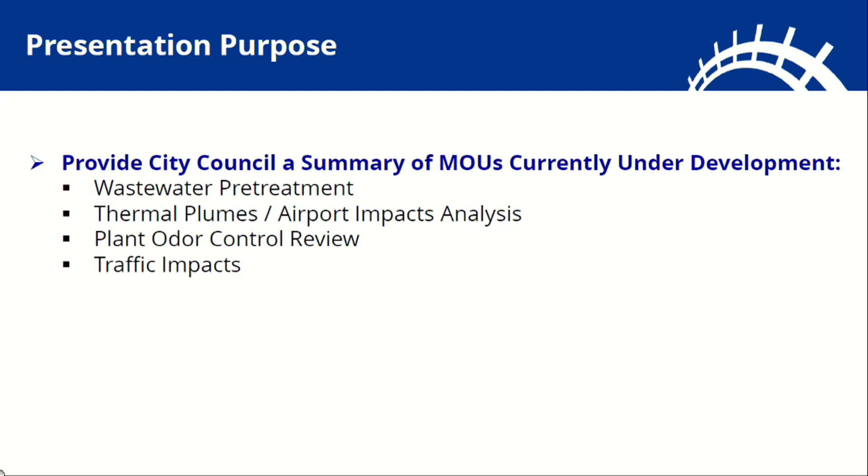Our presentation today primarily wants to cover four things. Specifically, myself and Black and Veatch will cover the first three here. As Todd mentioned, the traffic impacts are actually item 2.9 on the agenda, because there is that request of the committee to receive and file the traffic study to progress into the MOU. The topics we're going to mention here around the MOUs and what they will contain is relevant to that, so that's why it's listed here in 2.8, but then will be acted on in item 2.9.

There are a handful of MOU topics, and as Mr. Gaustad talked through all of the various items included in the checklist, within that checklist specifically there is Exhibit 323, which is a lot of the technical information that we've requested from Fufeng, that ourselves, Black and Veatch, have been working to request, receive, review, and provide various evaluations. We're at all different stages of those evaluations across all of these items listed here today. The red is what was on the prior slide that we intend to cover. The green is what we've made some decent progress on.

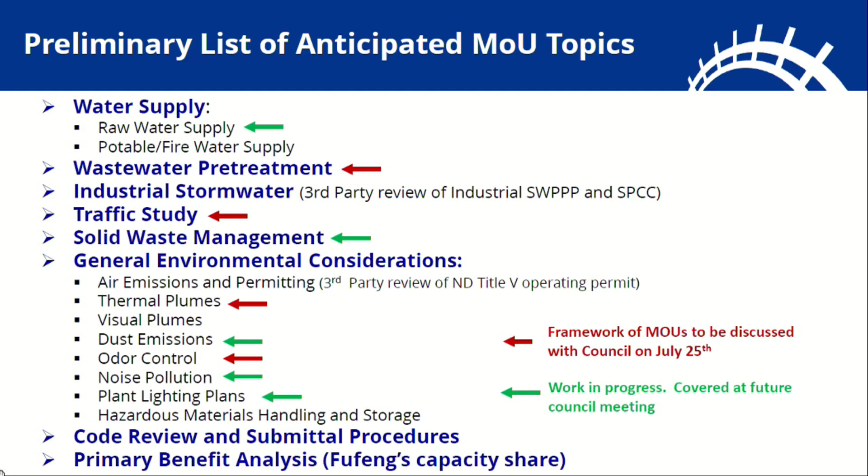We'll be coming back to committee and council in future meetings to review. So, like I said, a lot of topics here fit the various categories that were in that Exhibit 323.

Within the development agreement, we'll walk through the four items mentioned. As far as the MOUs, the development agreement exhibit asked for all of this information, which we'll need to ultimately make determinations on the plans. The MOUs are essentially the next step to implement the conditions and requirements of the agreement, to say we've reviewed it, we agree with the plan or the best management practices being proposed, and document that as our expectation. In addition, there are items in these MOUs that address what happens if things differ.

Under item 6, it's the contingency plans. If things don't operate as intended, either conditions vary with the site, the project, etc., what will the plan be to address that, and what will the remedies be should things vary from that?

So taking the development agreement from just the development stage into the implementation stage and what's going to be expected of the project. I'm going to hand things off here to Mr. Boersma from Black & Veatch, and he's going to walk through 3 of those 4 items, specifically the wastewater pretreatment evaluation and the thermal plumes review.

And Mr. Schauer from Mead & Hunt, who is the airport's consultant and who we have been working directly with in the review of emissions-type circumstances that have the potential to affect the airport. Mr. Schauer and Mr. Riesinger from the Airport Authority—we've been in detailed conversations reviewing that information. Mr. Boersma will cover that.

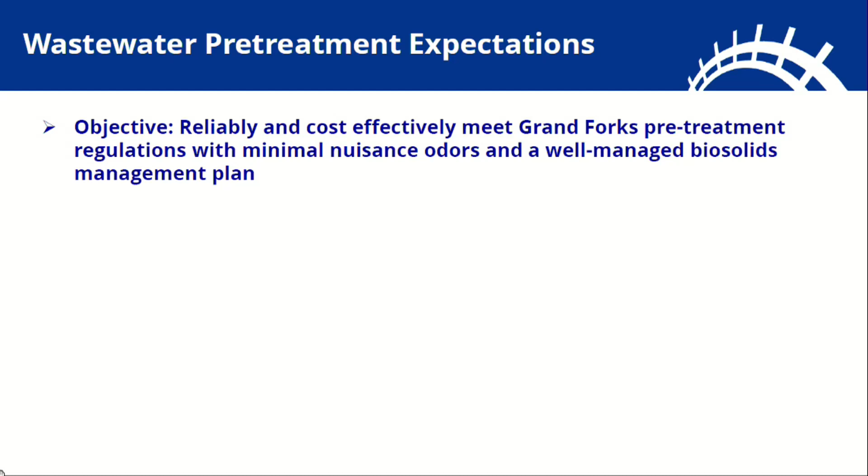The objective for wastewater treatment is to reliably and cost-effectively meet Grand Forks pretreatment regulations with minimal nuisance odors and a well-managed biosolids management plan. That's really what we are trying to achieve.

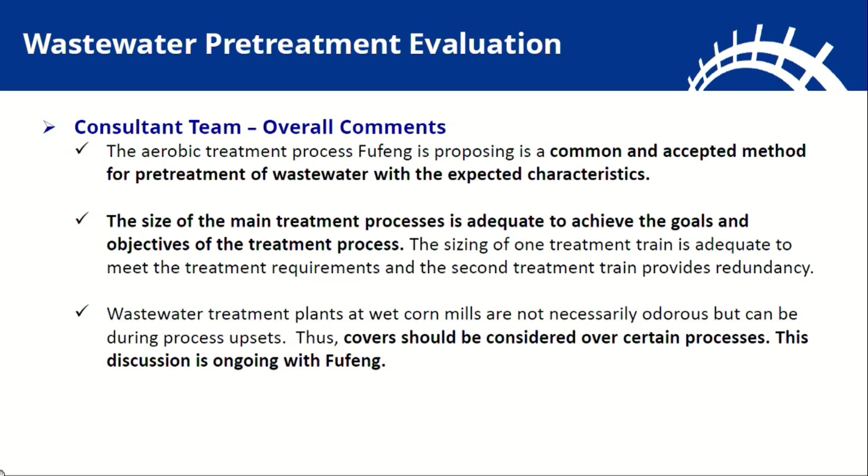Sean, if you go to the next one. So clearly what we have seen right now is a very preliminary design. We will expect to be getting a much more detailed design that we can review. And as part of that detailed design, we would expect to receive what are termed standard operating procedures. These will be used to address potential process upsets, loss of power, temperature management of different products that they produce, and really just flexibility in operations.

So the bottom line is we feel like there's a good core process they are providing. We are anticipating seeing more detail that will help us evaluate the robustness and the contingency planning around that process. So I'll take a break and see if there's any questions at this point.

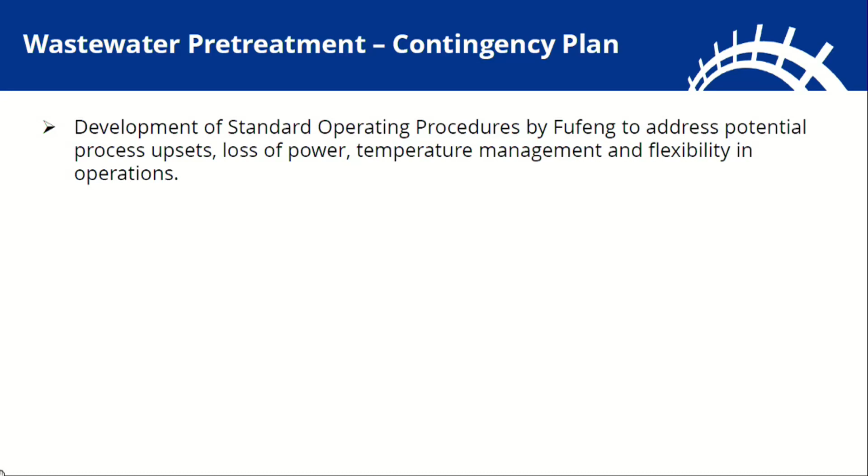Mr. Weber, questions? Thanks, I'll go backwards if that's all right. I'll start with slide 10. Mr. Gaustad, this contingency plan that's being proposed, it isn't really a contingency plan, it's just a statement at this point. These are the kinds of issues: potential process upsets, loss of power, temperature management, flexibility in operations, et cetera.

These are the types of contingencies that would be codified in the service contract agreement? That's correct, and I know they mentioned the MOUs. I think some of these are probably one and the same with respect to the utility service contract, so that there are these expectations, and then there's remedies, provisions within those agreements, whether you call it an MOU or the utility service contract.

Very good. And then slide number 9, consultant team, overall comments. With the exception of, possible exception of Mr. Vian, as council members, I don't believe that we have the expertise to know any of this. This is why we hire consultants, bring in experts. So I think we're just left to trust that regarding comments such as accepted method for pretreatment. We don't have that expertise, but that's why we hire, and we have respected, legitimate consultants on this. So I'm inclined to go along with accepting the statements on slide 9.

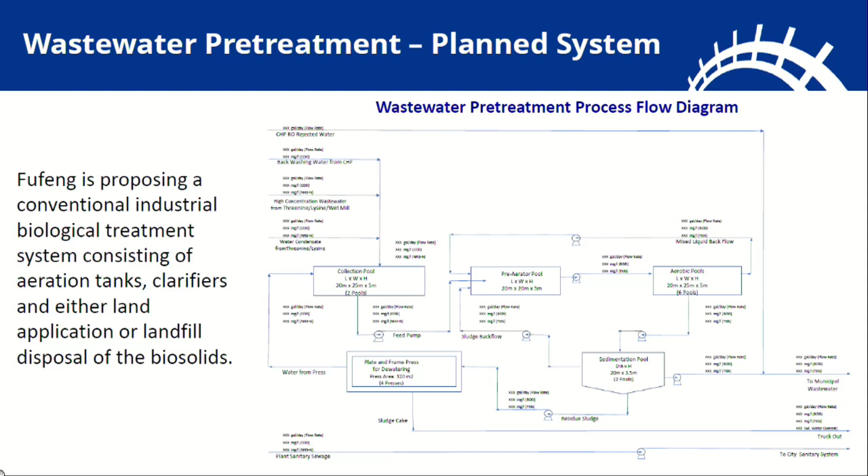Mr. Weber, I guess I'll start, and if you want to fill in the blanks. This process flow diagram is meant to demonstrate that we're asking for pretty detailed information from them, and they're providing it. There's a lot of background flows, loadings, blower sizing, recirculation rates, all the different things that go into making this work. Yes, they're giving us that information.

So they're in the preliminary design process. We will also get to see their final designs as well. Right, because this is just a preliminary design process. There will be a final design process, and then there'll be the actual construction, and at each of those steps we'll be monitoring that. Correct, we'll get a chance to see that.

There is additional water pretreatment residuals that will also be blended to this. So their total flow on average that will be discharged to the city will be 2.6 million gallons per day. But for the wastewater that is actually of high strength being utilized in their process overall, that they will be pretreating, this value is slightly different than we've shown before. I just wanted to point that out.

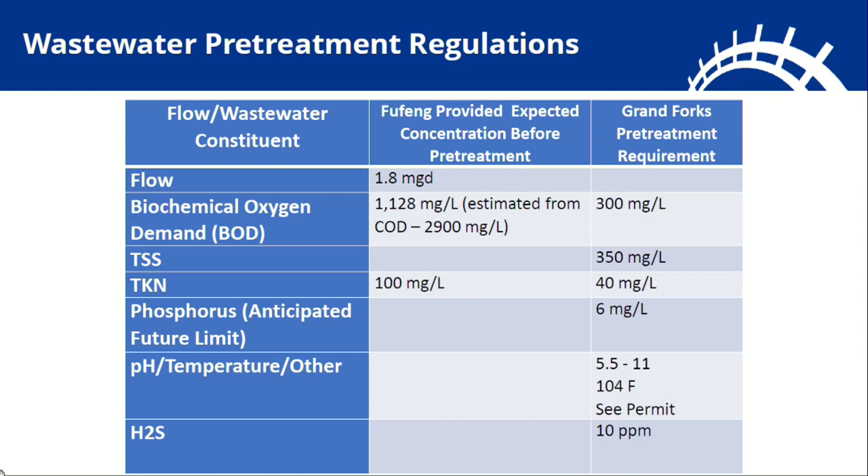Very good, thank you. And I've heard complaints or concerns that why didn't we know all of this before we made any agreement to start working with the program developers, the project developers. But of course, they don't know all the answers to this either. We're developing this all in concert with one another and going through a design phase to see what's going to be required.

And all of these requirements from the city for pretreatment certainly are well within the bounds of state and federal guidelines. We're not doing anything that, in some cases, even just meets those.

Ours are more restrictive than the state and federal in some cases? Correct. Your pretreatment program has to, at a minimum, meet the federal requirements, and then there are what are called local limits to those federal requirements that at least have to be federal standard or more restrictive. Very good, this is really helpful.

And with all of that said, I feel much better about slides 7 through 10, with one issue, and I'll go back to slide 9. One of the things that I remember learning from our field trip, slide 9 was the... let's go down, those were the... This one? I don't have slide numbers, the evaluation. And I'm looking at that final comment about covers.

One of the things when we went to Nebraska and Iowa to look at the corn milling plants there, one of the problems that we saw was a pretreatment facility that did not have covers, and it seemed that that's where the odor was coming from, at least according to the city officials that we visited with. So I understood that we were going to be insisting upon covers. Are covers necessary or not?

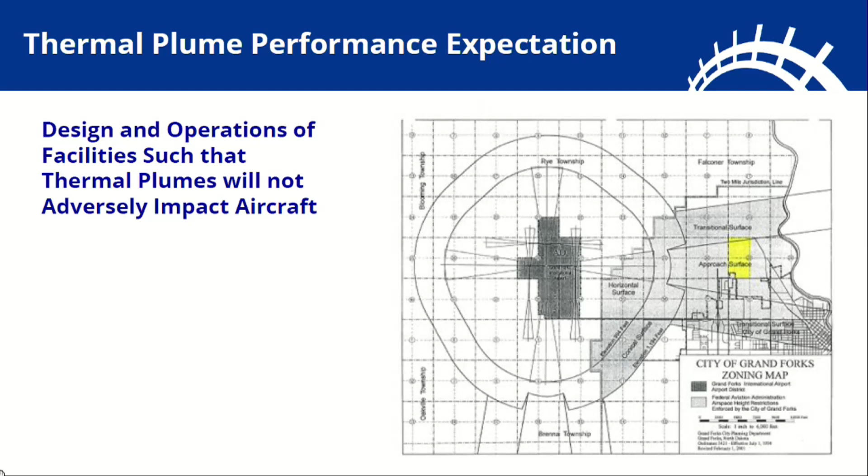Intuitively, think of being on an airplane in very turbulent air conditions. That's what we are trying to avoid in this case. Sean, if we go to the next slide.

In this case, there are no hard and fast applicable regulations. There's no specific FAA regulation, but the city is responsible for compatible land use around an airport, so the FAA does not get too directive in saying you can or cannot do this. But the second bullet here is that the FAA, in a review capacity, could evaluate potential hazards near airports and could issue some type of hazard determination.

By the way, the language on this slide and the subsequent evaluations were done very closely with Tom Schroyer. As Mr. Phelan had said, Tom emailed that he was not available for this call, but we've had extensive conversations with Tom in his aviation expertise as part of developing these slides.

The third bullet here is the desire to ensure airport operations are not negatively impacted. We want to make sure we don't inadvertently put the airport or FAA in a challenging position with a thermal plume. Tom advised us on this last bullet that a plane coming in at 20,000 feet away from the runway would typically be at an elevation of 1,000 feet. That's what it should be at.

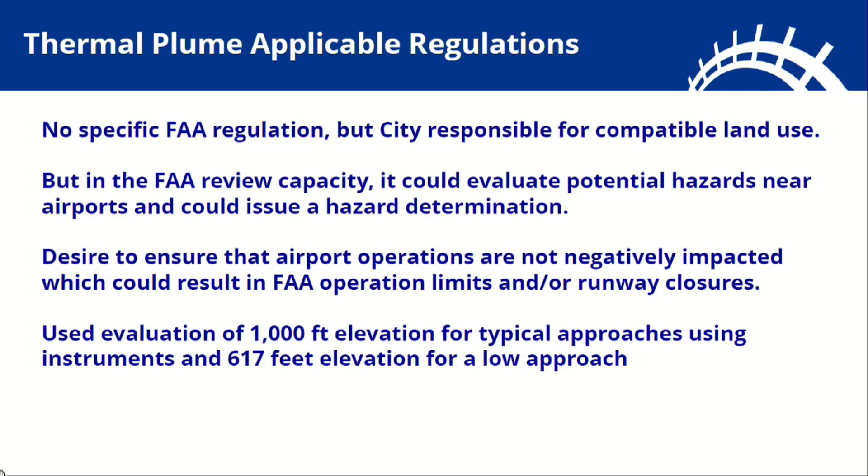We can go to the next slide, please. This is a bit of engineering detail, but on the left-hand column here is what they will normally operate their stack discharge at. The bottom bullet here is 250 degrees Fahrenheit.

They will normally be at that temperature, but if they are not doing some heat recovery out of that thermal plume, they can be as high as 650 degrees Fahrenheit in their discharge. So this is the information that we evaluated. If we can go to the next slide, please.

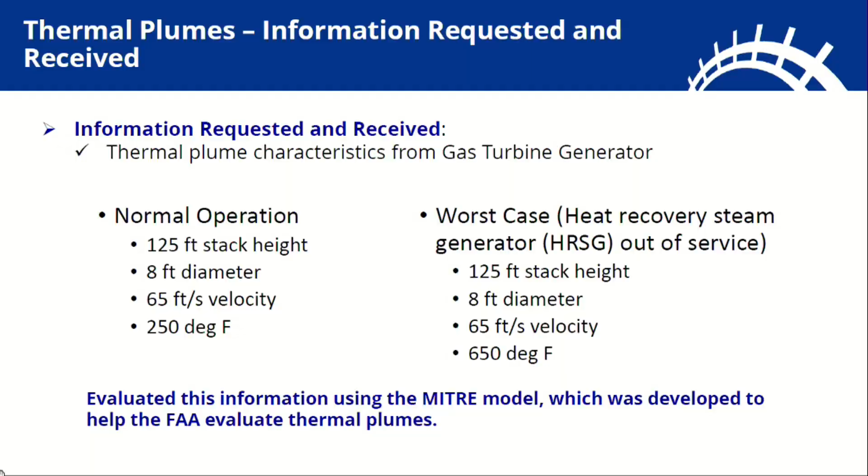We used, and Adam Marcos is on this call, and he helped us do this. We used a model, it's called the MITRE model. It may not be that important, but it's a model used for such applications. It is accepted and recognized by the FAA.

And effectively what this model is doing is looking at a thermal plume, and what it's modeling is the probability that either some type of turbulence could be encountered by a plane, either turbulence or just an upset in the flight path because of the thermal plume. And remember, with any group of aviation, acceptable probabilities of things that aren't desired are very, very low.

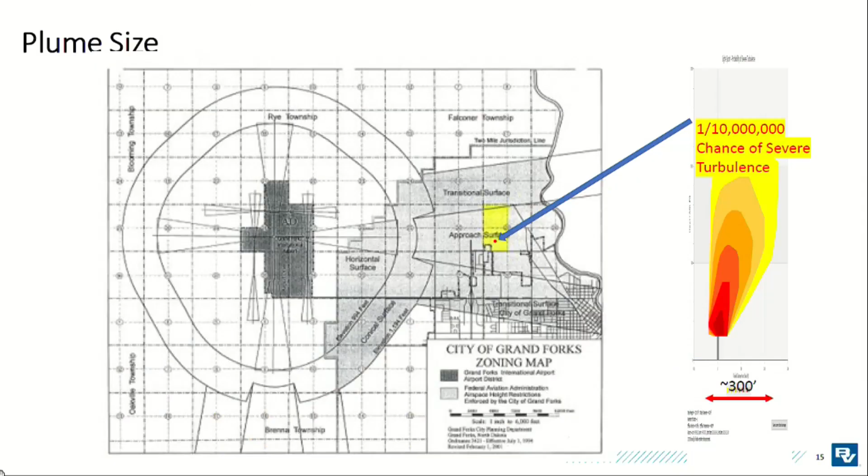One more slide here, and I ask for your patience as we're almost through this topic. But when you consider an aircraft approaching the airport, not only do you consider its height, not only do you consider the thermal plume, but you consider the type of the aircraft.

In the essence of this slide, what it's showing is that for commercial aircraft, at the elevations we're talking about, between 1,000 and 617 feet, there is no adverse impact of any probability on commercial aircraft. The same is true as we move to the lower right, there's no adverse impact of any scenario for business jets. In the lower middle graphic, it's the same thing, there's no adverse impact for light general aircraft.

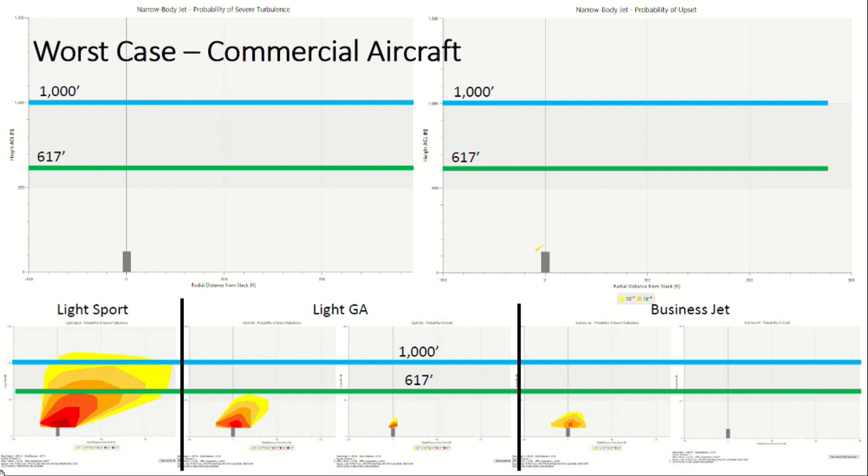If we go to the next slide. So here's our overall conclusions with a thermal plume. There is not an adverse impact for light general aviation planes, the type used by UND for training, or commercial aircraft under any scenario. This is not even, second bullet, in the area of flight paths used by UND for training. Third bullet is there's a very slight impact for these very light sport aircraft, but light sport aircraft make up a very, very small percentage of air traffic.

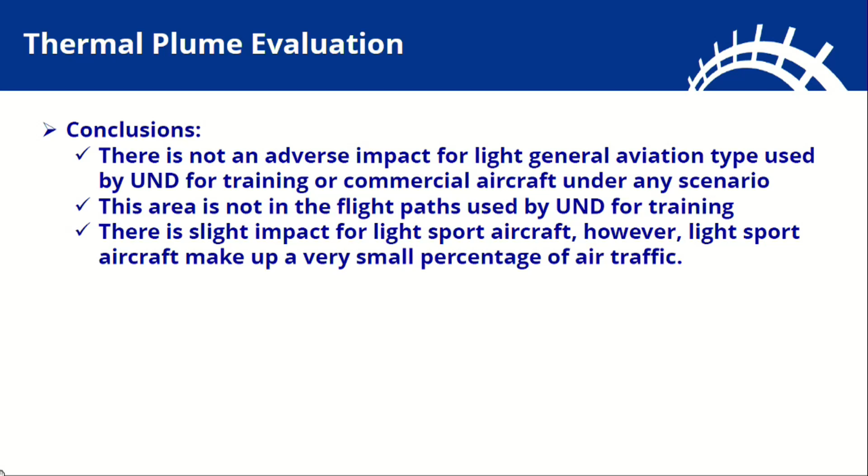And if, as Fufeng is built, last slide, we would need to work with the airport for appropriate procedures, which may need notifying these extremely light sport aircraft pilots of potential airspace, staying out of the area around Fufeng if there's an upset in there and they're not doing thermal recovery from their plume. So I realize I said a mouthful, but we're trying to sketch out for you, there's a lot of discussions with aviation, and we're trying to summarize aviation issues associated with Fufeng, because aviation is very important, obviously, in Grand Forks.

I'll pause here for questions. What about the steam plume? Questions? Yes, Mr. Weber?

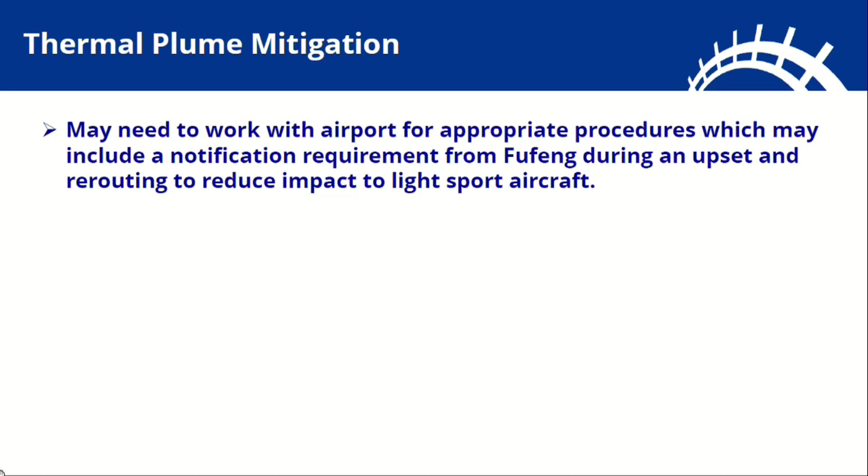Mr. President Sandy, I found this to be very useful, very easy to understand. In fact, while there have been dark conspiracy theories about your connection to China, President Sandy, you actually do have a small conflict, not of interest, but a conflict with this project because of the need for us to make, you and I both, we want to see a healthy UND.

Slide 15 seemed to take care of my concerns about that. I'm curious about your response to slide 15, Mr. Cadillac.

I share the same concern regarding the visual plume, and I'm wondering what sort of work was done related to the visual plume.

We will be reviewing the visual plumes. The thermal plumes come from things like the stacks Paul described, for their gas-powered turbine generation. The visual plumes are more from a cooling tower perspective, and they're still working through some of their design details on flow rates, cooling rates, et cetera, with those cooling towers. So we just don't have all the information to get through that yet.

We wanted to share that we're pretty well along in this. We've had some good meetings with the airport. The airport asked the exact same question of us: please work with us when you have the information available on those visual plumes. That's still in process.

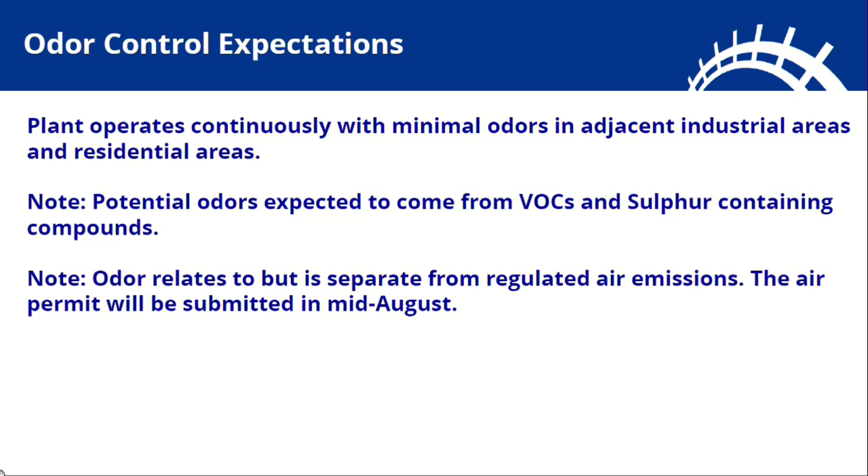There are state regulations that apply. With air emissions, there's extensive federal and state regulations, but with odor specifically, the following more qualitative regulation applies. This is directly from state statutes in North Dakota: a person may not discharge into the ambient air any objectionable odorous air contaminant that measures 7 odor concentration units or higher outside the property boundary where the discharge is occurring. So when you move into the world of odor, unlike wastewater or air emissions where you're talking about concentrations in parts per million, what you're really dealing with is how many times it takes to dilute a sample to the point where you can no longer smell it. Some things take a lot of dilution because they're fairly smelly materials, and other things take fewer dilutions. But that is, in effect, the state regulation.

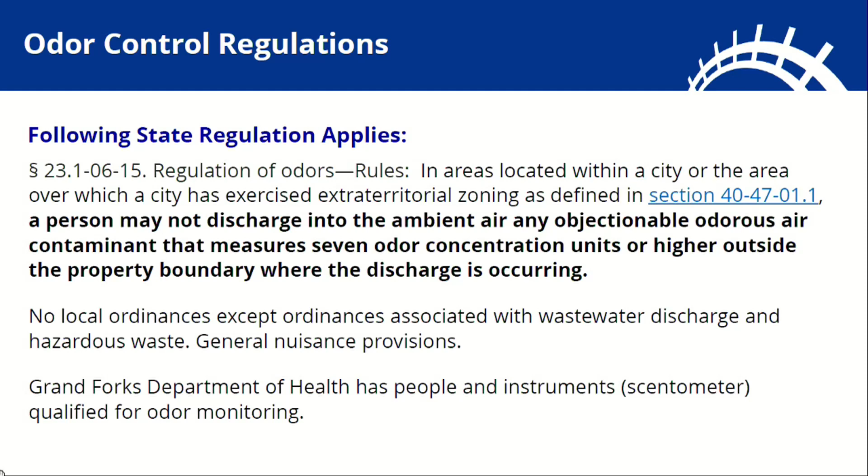So there are state regulations that apply. It's important to note that there are no local ordinances specifically addressing odor, but there are ordinances that still speak to odor, especially with wastewater discharge and hazardous waste, and there are general nuisance provisions in the municipal code for Grand Forks. It's also important to note that the Grand Forks Department of Health has people and instruments, including a device called the scentometer, qualified for odor monitoring. If unacceptable odors are detected, there are mechanisms by which your local Department of Health will work with the state regulators to enforce these regulations. So that's a bit of the regulatory context.

Let's go to the next slide.

There's a lot of things on this slide. Again, we appreciate you providing this graphic. I'm going to summarize the left-hand column. When you think of what happens at a wet corn mill, it's effectively this: there's raw material, corn that comes in and is stored—storage of that corn is potentially a source of odors. Next, the corn goes through a steeping process, where it's soaked in sometimes a dilute acid, like sulfuric acid, to help break it down, which can also generate odors. There's a fermentation process to start making the ultimate products you want, then a material processing or drying process, and then a wastewater treatment process. So there are really 5 different steps in the wet corn mill process, each with their own unique potential for odor emissions.

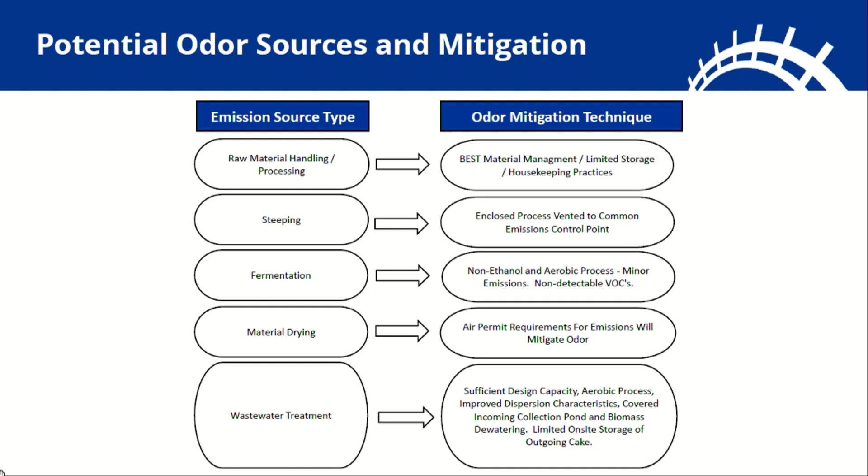Let's go to the next slide.

We have gone through this with Fufeng, and we have process engineers within Black and Veatch who have been fairly involved in the air permitting and design of wet corn mills. With this first step of material receiving and storage, we concur with their recommendations of how they're going to deal with odors. I won't go through the details of these processes. For the second step, steeping—the corn being soaked in dilute sulfuric acid—we likewise concur with the recommendations they are making. I feel they are using state-of-the-art technology for odor control in this step of the process.

If we can go to the next slide, please.

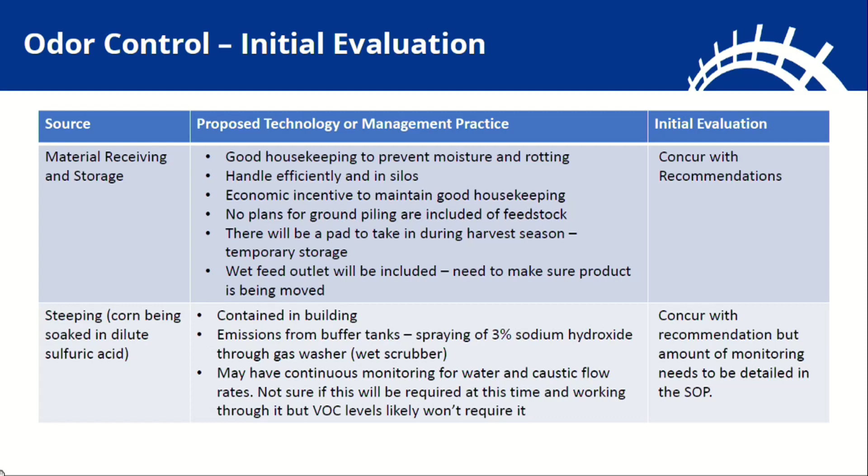For the fermentation process, likewise we concur and understand the technologies they are going to be using to control odor. On the dryers, they are proposing a newer technology. We understand why they are proposing it, but it is a fairly new technology, and effectively we are asking them for more details, more justification, and some more data to get a better sense of how this particular technology will work with the dryers. It's not that we disbelieve it's going to work, but because of the newness of the technology—at least within the North American market, though it may have had more application in overseas markets—we would just like to see more detail on it.

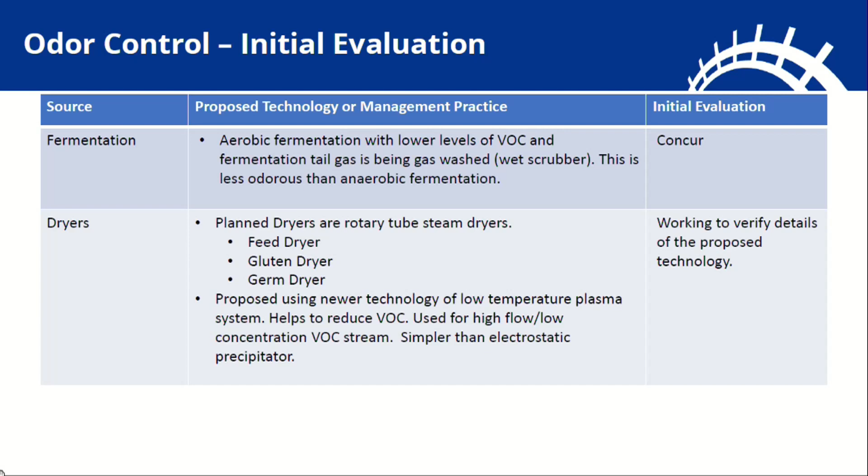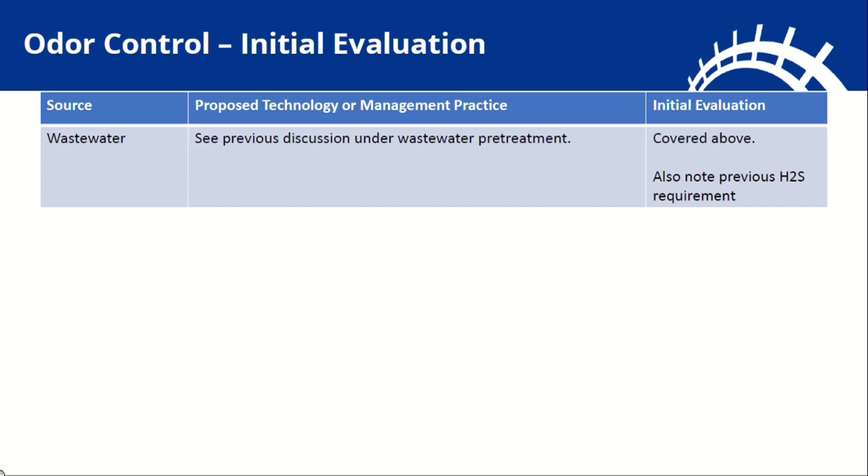And then if we can go to the next slide, please. With wastewater, we've already had a previous discussion about odor control and the potential for whether we cover unit processes or not. Sean, if you can go to the final slide.

So the air permit will be submitted in August, as was noted. We will see a lot more detail in August. In general, our observation or conclusion is that Fufeng is proposing appropriate technology for what has been reviewed. Similar to our wastewater observations, we want to see more of the details of that technology, have a discussion with them on the robustness of the equipment, the sizing of the equipment. But in terms of whether the technology selection at this point, from what we have seen, is directionally correct and appropriate for the application, we are saying that it is.

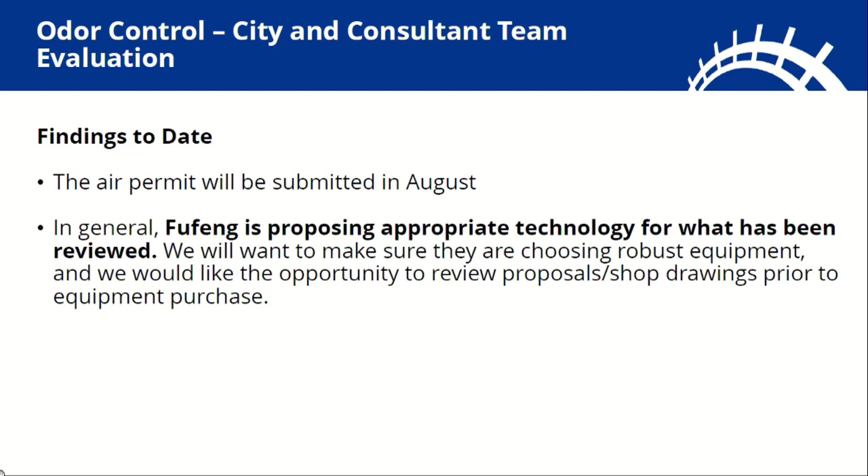And I think we have one more slide and then we're done. That's it. Okay, so I will pause here, and again, I moved through this quickly. It's a very important discussion. See if there's any more questions we can answer. Any questions related to this?

But Paul, do these gentlemen know where the equipment is coming from? Do they know what it looks like? I was purchasing new equipment. Excuse us for interrupting, please. We don't mean to interrupt, but this is such a farce. We've seen the equipment, this state-of-the-art robust equipment. Have you seen it, sir? It's disgusting. It came from California, from a plant that got shut down over 12 years ago. It looks like rust that should be hauled to the scrap metal. You need to wake up, City Council. It is outdated equipment. Don't smirk again like you are. Who's smirking? I don't mean to be... I'm trying to manage a meeting. You've taken over. What would you like me to do?

Okay, if we wait until it's all over, it doesn't make any sense of how it applies to what you're talking about. I'm sorry, I don't mean to interrupt. So can I ask a question? Let me finish, please. I'm sorry, let me finish. I have seen the equipment. It's out by where my shop is. It comes in every day on trucks. It is junk, and he's trying to sell it as this robust state-of-the-art equipment. It's not true, I'm sorry. You have to open your eyes, people. Do you want to see the pictures right now? Mr. Spicer, thank you, pictures, I appreciate it.

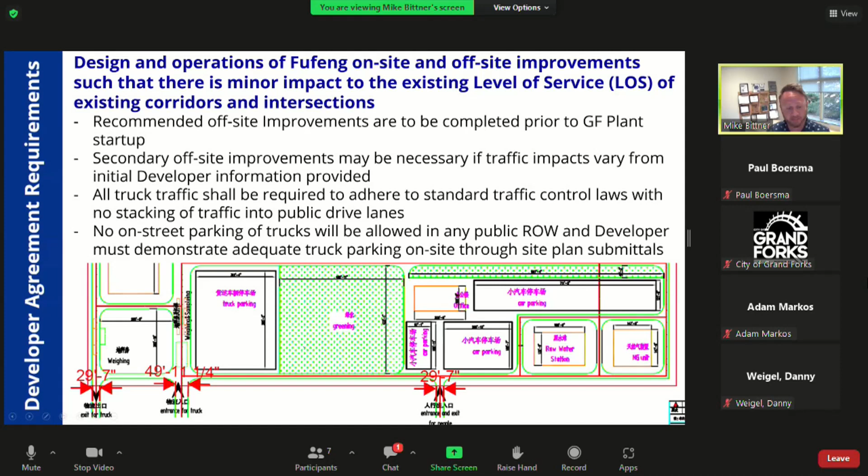So the information we requested and received from Fufeng was related to traffic generation: how much are you expected to bring in, how much are you expected to generate, how does that distribute between trucks and cars and freight, whether that be trains, and how many people work there? That way we can get a better understanding of exactly what those transportation impacts could possibly be.

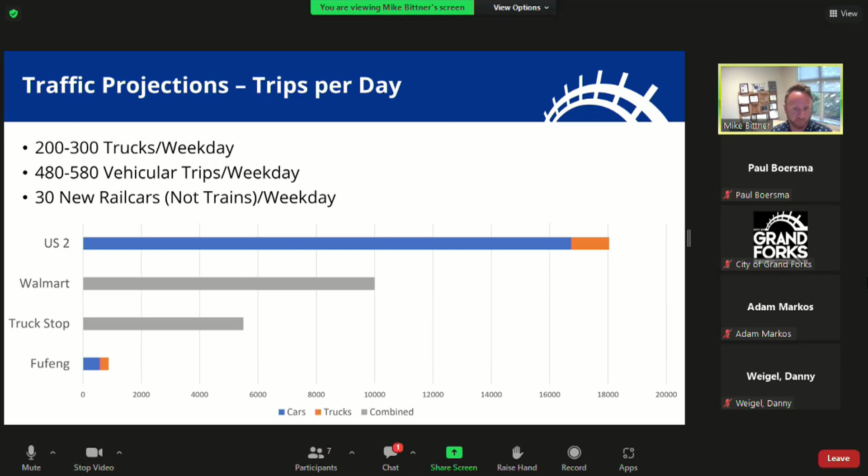So the way we assessed the improvement needs was we looked at regional trip generation to understand where traffic could be coming from and how long it would take to get here, to understand when it could occur, as well as freight distribution and logistic chains we already have through our system. We looked at local employment to understand where workers would come to and from this site. We put this information into a traffic model, which helps us understand turning movement delays and queues at specific locations. We also looked at railroad crossings, specifically on US 2, to understand how extra rail cars would impact traffic flow. Then we compared this to three other sites to make sure the component inputs made sense and were realistic as we moved through this process.

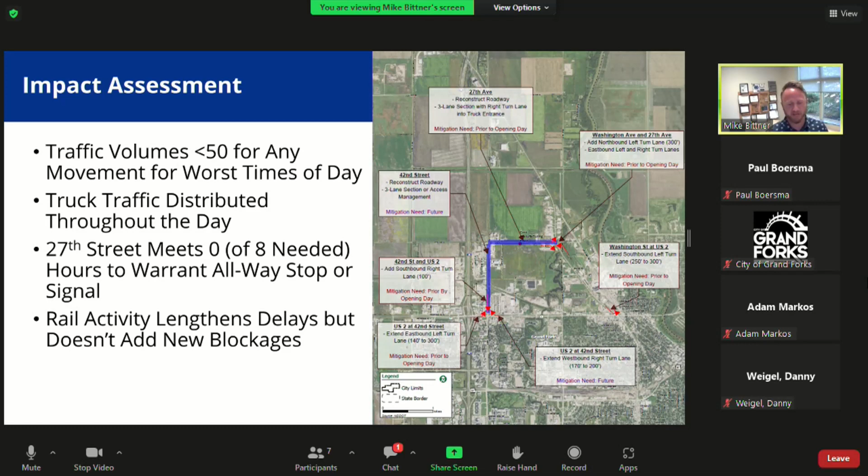Additionally, as we look at the rail activity, it was 30 cars, kind of being lumped onto an existing train based on the proximity to US 2, being able to get mostly up to speed. We didn't see a huge increase in overall delays from the rail standpoint. That's not to say there aren't delays today that should be considered for improvements, but specific to this site, it wasn't the basis for needing a major rail grade crossing improvement on US 2.

There were a number of necessary improvements, however, to support this site. The first of which is 27th Avenue — let me zoom in here. The improvement here would need to be a concrete roadway improvement, a 3-lane section transitioning to a 2-lane section to the west of 39th, based on available right-of-way.

Really, the primary need here is structurally just to be able to support those trucks, but also some of those turning movements in and out would really benefit from a safety perspective by having that center turn lane.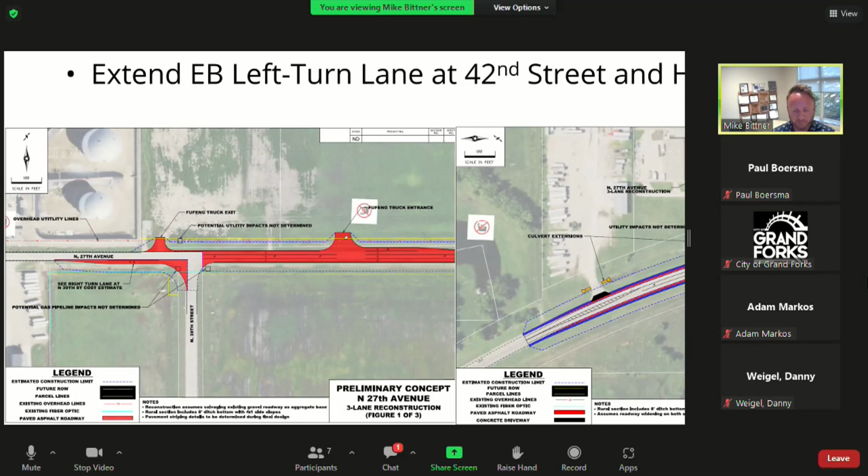Another one of the high dollar improvements, that first one was about $3 million to improve 27th Avenue. At Washington and 27th, we'd also looked at a northbound left turn lane and the potential for a southbound, depending on what DOT wants to do, but based on their criteria, we would require a northbound left turn lane, and that would be about $400,000, providing safety improvements and traffic flow, helping get those trucks and other vehicles off that roadway.

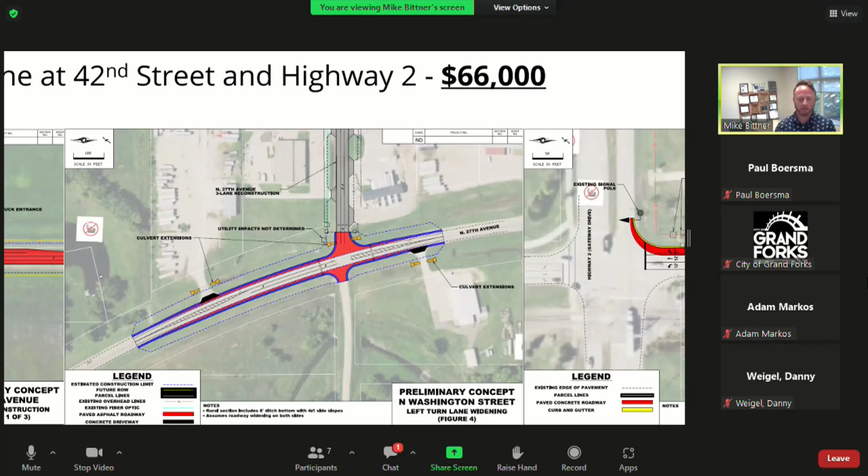And then the other high dollar improvement, about $150K, would be a southbound right turn lane. My north arrow is pointed to the right here. The southbound right turn lane is at Highway 2, or Gateway, and 42nd Street. From an operational perspective, as we add more traffic up and down 42nd, which is our primary access route and closest proximity to I-29, we could start to see some queuing and blockages, and that frontage road already experiences some of that blockage today. So that improvement would help with the traffic flow.

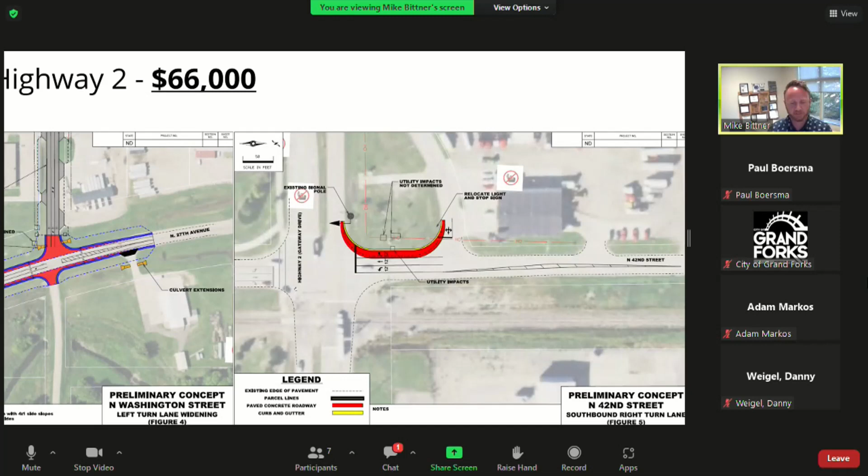Then two other smaller scale improvements would be just extending left turn lanes. As we add more trucks to the traffic stream, we're not having massive increases in delays, but we are needing more space. We have more trucks that take more space, with slower startup and stop times, which is reflected within our models. Each of these improvements were between $63,000 to $66,000. So in total, it's just shy of $3.7 million worth of necessary improvements to accommodate this site.

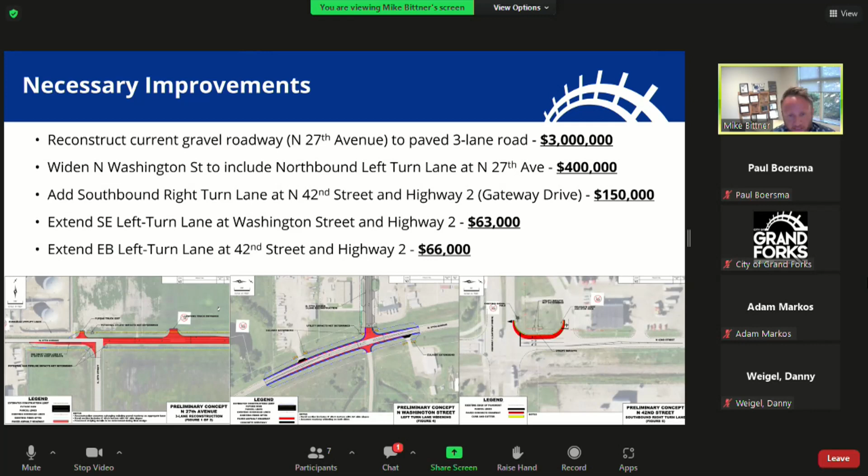So as you look at wrapping up the traffic study, the study report is completed. It has been reviewed by the DOT and approved by them. As I mentioned at the top, there's continued effort with the state to understand the best ways to develop a funding plan. A lot of these improvements are on U.S. highways, which is really the purview of the DOT. It's understanding how those projects can move forward to prevent some of those delays and issues that we might experience prior to the opening day.

And so the second item would then be requesting council action to receive and file this study. I'd be able to answer all your questions if you have them here in a second. Then from that point forward would be to translate that study into an MOU document. That way we can look at our performance expectations, which we started with, but also look at what some of those deviation, contingency plan, and remedy items could be, should this operate a little bit differently than what we expect. So with that, I'm happy to answer any questions.

Thank you, Mr. Bittner. Mr. Grasser, something else to add? No? Okay. Any questions for Mr. Bittner? Mr. Veen? Yes, sir.

Let me start out. How did you distribute the traffic hourly? You said you distributed it evenly. Did you do it through the 8 hours of the day, 12 hours, or 24 hours?

Yeah, so we actually tested a couple things with that specific distribution. We tried to talk to some of those similar sites to understand how they come in, and really their experience was often that it's pretty evenly distributed. It's hard to know exactly when. We've also heard that it's specifically very early in the morning to unload some of that material early in the day to beat some of the peak traffic. But we actually tried loading a lot of that into some of the peak hours to be extra conservative, to make sure our improvements were able to accommodate some of that daily and seasonal variation we might see from a site like this. We also tested it with more of an even distribution throughout the normal operating days where they would be accepting corn in and then also generating completed final product out.

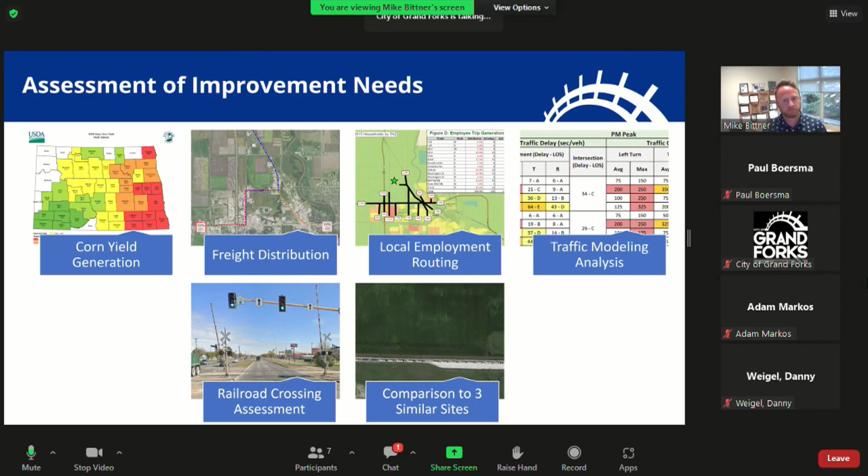Mr. Veen, knowing that trucks coming off the interstate, turning east onto Gateway, are most likely going to be turning north onto 42nd Street prior to the railroad tracks, won't that flow be continuous even if there are trains there? Yeah, I think that's where a majority of it will go. It just depends on if the rest of the traffic builds in. Yeah, sure, that would be the only thing.

I prepared that because that would just be a future expensive project. We started looking at that a little bit through the MPO before. I just would like to know what the continuation of that should look like, so we have awareness, is all I was looking for.

I have a question for Mr. Bittner. I know this is probably a silly question, but I assume when you're taking your study, you're comparing actual truck traffic versus any vehicular traffic, because trucks obviously take longer time to stop and more time to speed up and go through intersections. I am concerned about that North Washington and 27th Avenue North intersection. Of course, we can always go in later and add something, and I'm sure we'll be watching it very closely. But to me, although it meets 0 of 8 criteria, I have a hard time believing it. I believe your study, I just don't understand how that something isn't necessary there. And you don't want small business impacted?

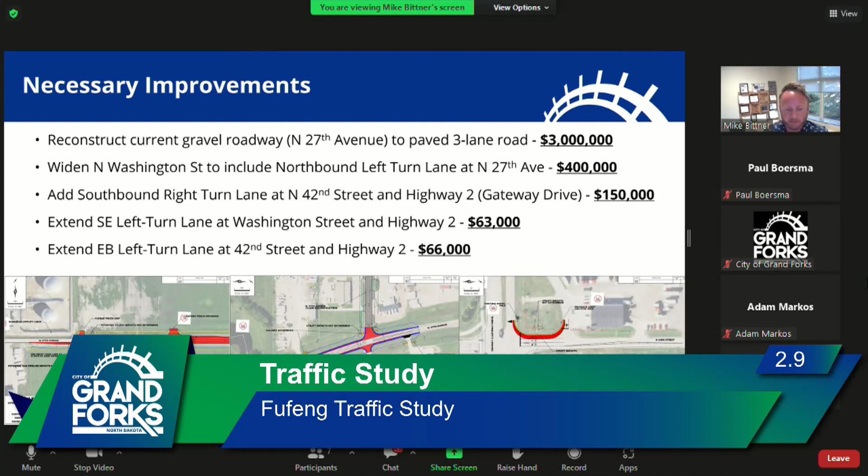And then I've got another question. How much is the... I'm a little higher on the overall trips, 580 plus 300, but in the scale of things, you've absolutely got it all correct. Yeah, in comparison, the impact of Fufeng is really minimal, far less than I was anticipating.

With the other studies we're looking at, the other aspects of the development agreement—odor, air quality, et cetera—we'll continue to receive additional data. But with the traffic study, can we anticipate any additional data, or is this kind of where we're at now?

Is there any more that we would be getting, Mr. Grasser or Mr. Bittner? I think at this point in time we've got the best information available from the developer as far as what kind of traffic they're going to generate. The next step is part of that MOU agreement, which basically says we need to operate within the parameters of the data that's been provided. Otherwise, we need some mitigation techniques from the developer, just to make sure we stay within the representations that we currently have.

So in closing then, the impact of Walmart was multiples of this, and it's not something that we discussed or that we've even noticed really. We haven't gone back to do that, and yet the hysteria around Fufeng would suggest that this is going to be some terrible impact on our community. Thanks for the information, Mr. Grasser. Any other questions related to the traffic study?

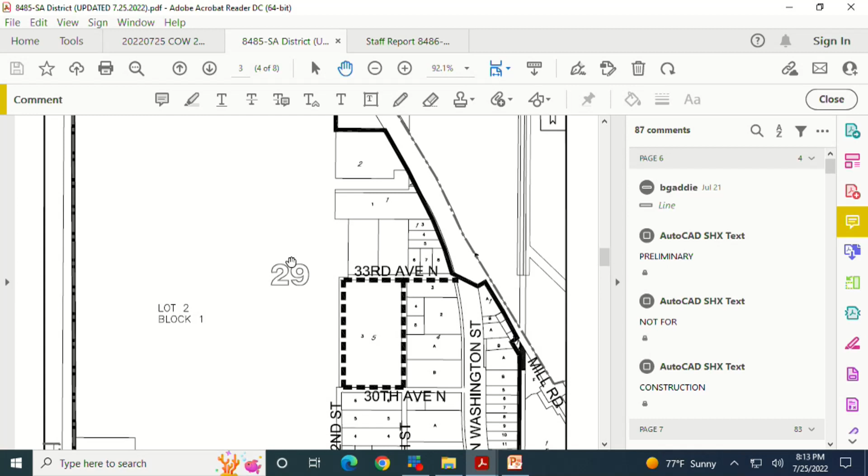Also note here, lot 2, which is the main development lot, has areas prescribed under the flood protection project when the Corps of Engineers did it—they had a general break line in these rural areas. In this case, part of the water will flow north and part will flow south into the English Coulee. Again, the entirety of the lot is brought into the district, but that doesn't mean the entire lot will drain into the pond.

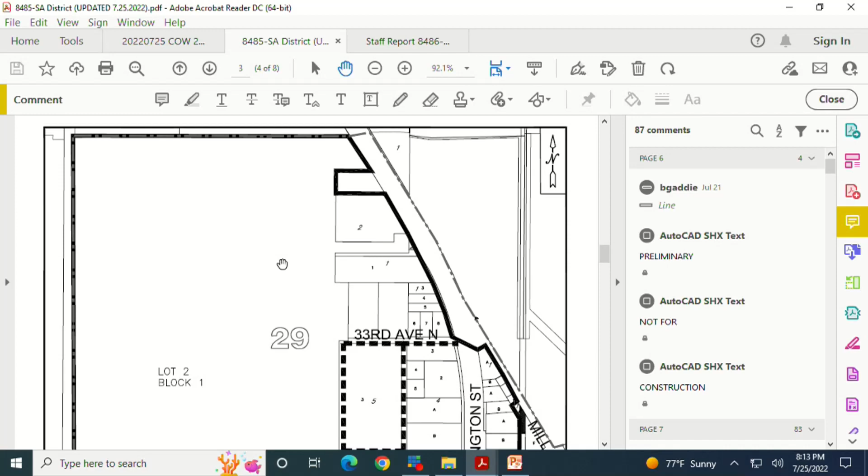The last component of the engineer's report is the timetable for special assessments. This one identifies the stormwater improvement with the pond. We are here, in the process of approving—we would approve the engineer's report, directing preparation of plans and specs, and advertise for bid.

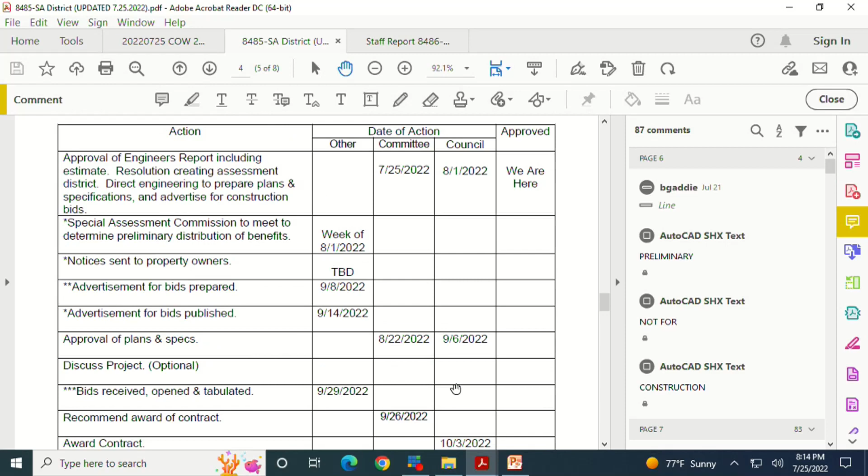It'll go to committee this week and council in a week. There's another set of processes where we track when the bids are going to be prepared and advertised. You'll see it again on this schedule in August on approving the plans and specs—that's a necessary component. It goes on to the following city council. On this schedule, we're looking at opening bids the end of September and awarding the contract at the council level around October 3rd.

Part of what's driving this timetable is that a stormwater pond is a large excavation project. They'll be excavating probably with scrapers and/or backhoes to get the clay out. In our area, the soil is often very saturated and wet, making it hard to work with. What we've found over the years is that one of the best techniques to get the lowest cost on that type of work is to do it essentially as winter work.

That's not dead-of-winter work, but usually what good contractors try to do is, as you go through the fall and it gets cold, the ground gets firmer and starts to freeze. They chase the frost down so they've got support for their equipment. This anticipates that, and we're trying to hit that sweet spot where the contractor can hit the ground and do some of that work as frost is going into the ground.

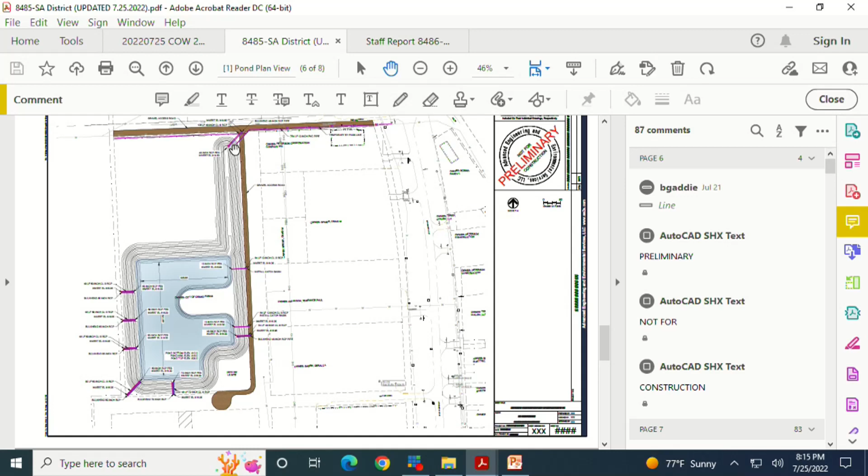This is just a general sketch of our expectation for the pond right now. This may change. We're still looking at this finger that's coming up on the pond, whether it's more cost effective to do an open excavation or pay for it as a pipe. Concrete pipe has gotten really expensive, especially of late.

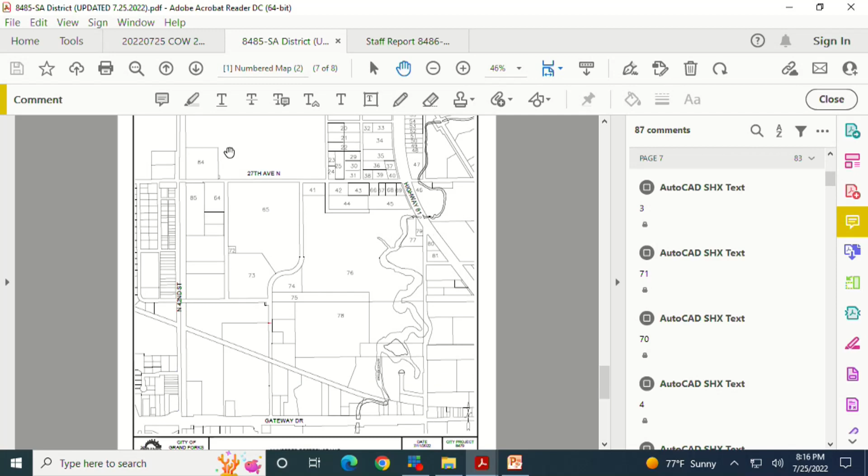Some past history here: this is a map of quite a few lots, not all applicable to this particular project. Back in May there were a number of discussions in the spring about special assessments and things, and this map was created to identify where you are on this spreadsheet. I won't go through the spreadsheet, but it was approved by City Council on May 16th. We have a whole host of projects listed here that will have some level of potential special assessments.

Breaking it down, if you look at all the items on the left-hand side of the line, those are costs we anticipate being picked up through various state programs or locally. The items on the right-hand side would be the actual special assessments expected to be levied. In this case, for the pond, the special assessments here are zero for most of the properties.

So what we're doing with the special...

Mr. Grasser, just to confirm, all of these documents are currently available on the Grand Forks City website. This is item 2.10 on tonight's agenda, right there in public view. Thank you, Mr. Grasser.

Again, this is back for reference. What we're trying to capture with the special assessment is the intent of that document. You'll see there are dollar amounts where some of our updated cost estimates differ from what we had back when this was originally done in May. But what we're trying to do is capture the intent of this document as part of the special assessment.

With that, I'll go back up and walk through the engineer's report that gets us to that point.

This is the engineer's report where we look at the dollars of the project. This is one of the more complicated ones you'll see, maybe the most complicated associated with these projects in general. Your life as a council person with special assessments will get easier to read than this for the most part. So I'll go through this line by line.

In concept, we've captured the costs generating cost to the project, and we're going back through subtracting out cost offsets. At this point, our latest estimate for construction cost and associated costs is about $3.6 million. We have a little under $500,000 in professional fees for design and construction inspection—that'll actually be the next item on your agenda, so we're hiring professional services to do that.

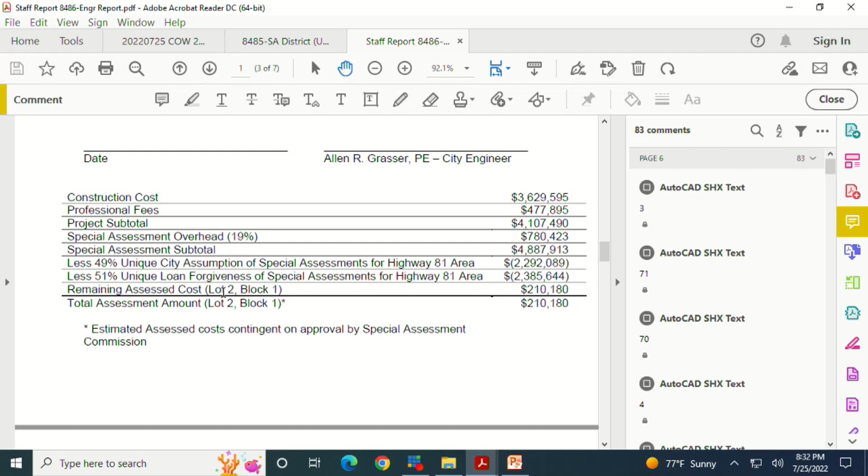We've been able to save a few dollars on the original agreement with S&S Trucking. It gets kind of complicated, but some of these areas, they're lots, but they operate kind of as one parcel, one entity, with overlapping trucking and buildings. By treating this on a parcel basis instead of a lot basis, we're actually able to reduce a little bit of our stormwater pipe costs.

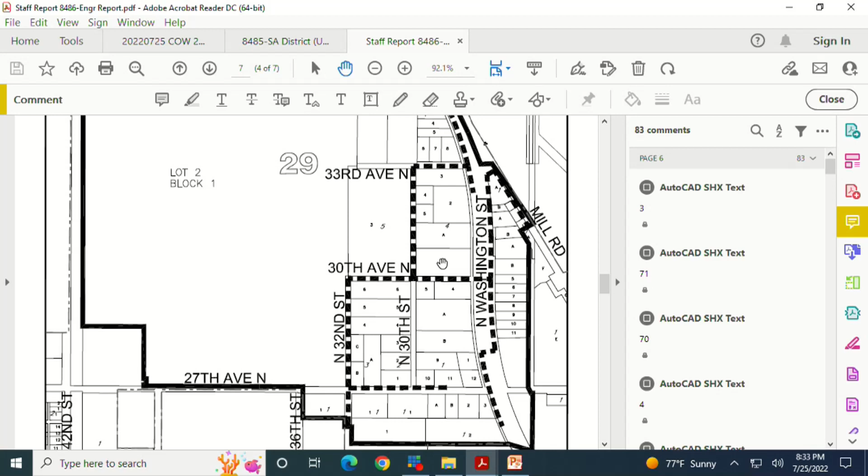Our cost estimate right now is assuming, I'll call it more or less worst case, where we have to come up and around and add pipe. There are various discussions we're going to have with property owners that could help us substantially reduce the costs, if we have an easement that might shortcut through something, or a construction easement that might make the construction techniques cheaper for the contractor. Other than that, I think those are about all the unique items that went with this report.

So, additional questions related to parts A, B, C, and D for 210? Mr. Weber, any questions? Ms. Osowski? Yes, thanks. Just for clarification, once we've annexed this property, are we under federal obligations to put in things like stormwater treatment? I'm not sure they're federal, but the intent of annexing is to provide full services—fire protection, all those kinds of activities.

Very good, thanks. Are there additional questions, Mr. Veen? Do you have any questions on 210? Not under any obligation. Or is there a motion?

I'll move approval of 2.10 A, B, C, and D. Is there a second? Second. Thank you, Mr. Weigel. Any other comments, Mr. Veen? I would.

First of all, I appreciate the presentation, Al, that you made. I think I understand what you're doing and why you're doing it. Technically, it makes great sense—this is how we would typically do a project without question. With some of the outside funding going toward this project, I think it's maybe beneficial, because the alternative would have been more costs on the property owners. There is truly that benefit to doing this.